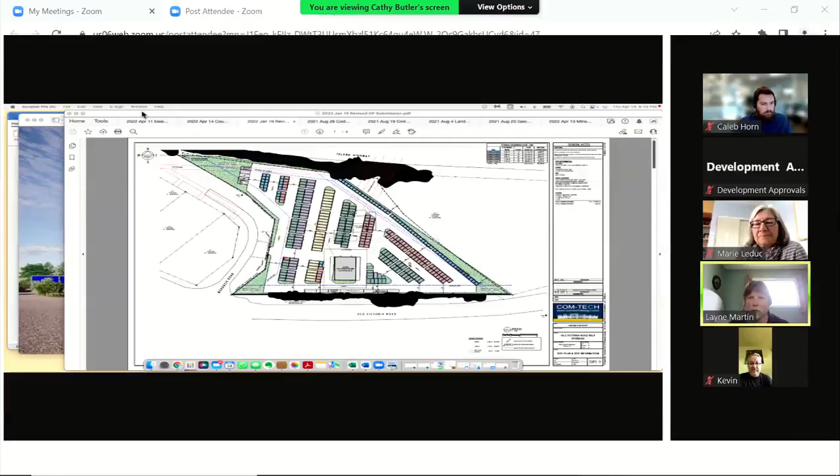We started out with the site, and instead of larger or low-slung pods, we designed smaller pods, as you can see - like that, that's a good one. We've spaced them out into a pod facility through the building code to maximize the site and allow for driving areas around it. In the northwest corner, we have a green space we're trying to keep so the whole site isn't totally filled with pods. That's one area where we're doing more landscaping and bringing up the greenery.

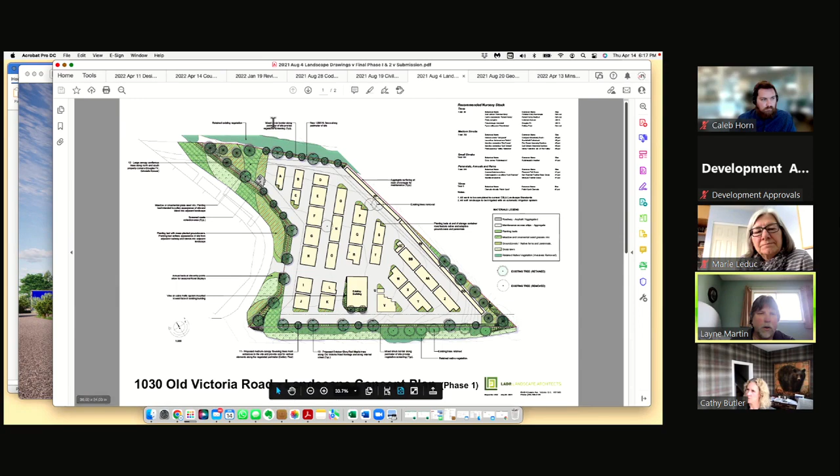Meanwhile, there's a whole area surrounding the site, especially on the island highway side, that we're trying to green up. If we go to the pictures from the highway side, driving down the highway - that's the type of view, and we're trying to hide it from the highway so it's not much of a distraction to drivers. So we're trying to hide the main single-story pods from the highway side, and any increase in landscaping is also trying to do that so drivers aren't distracted.

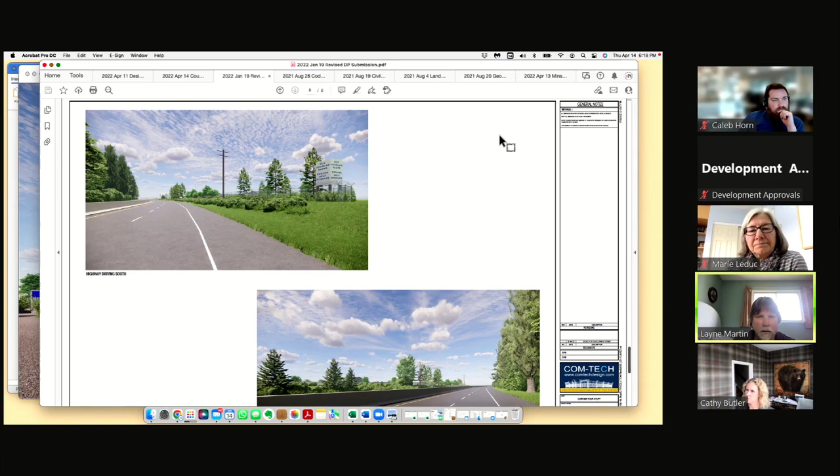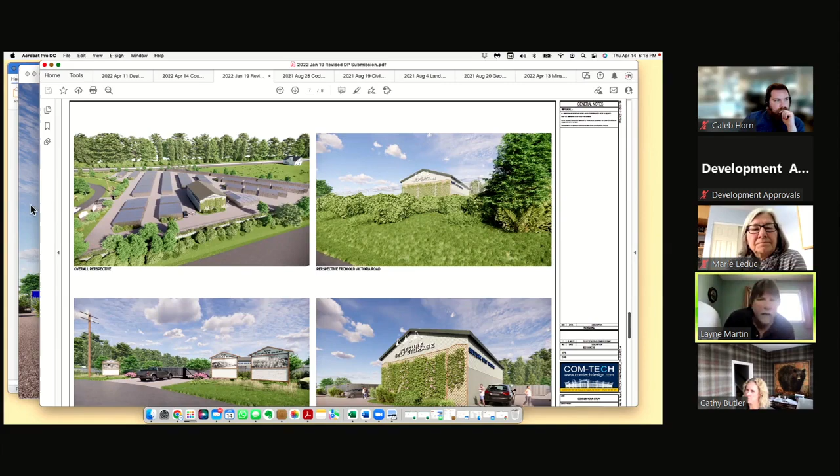Yeah, this is the latest drawings here. This one. This is the latest.

So this is the main building that exists and will follow and upgrade. It's an older building existing on the site that will have internal storage. We're trying to put some signage and upgrade the outside, adding a little bit of greenery and main lights on that building, the logo on the side, and lighting on the Old Douglas Mine Storage area that we'll try to call it and bring people's attention to it.

You can see in the background here also the pods. They all come in a silver color, essentially. The pods are actually...

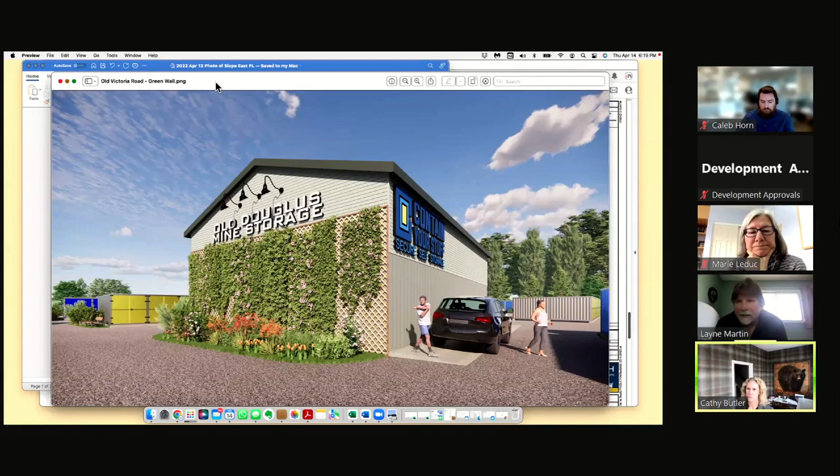not sea cans that are kind of old and rusted. We buy new sea cans, or new pods, that are built right on site and assembled from a manufacturer that we buy from. So it won't look like old sea cans stacked 20 meters high. It'll all be single story type storage area.

You can go on. Try and find this one.

Yeah, so the other item we're trying to do is the entrance point to the site will be gated. We're trying to have some decorative fencing, as was suggested by some of the commentary from the first view of the site.

So we have a planting bed that we're planning on the right-hand side. We're also trying to engage people right away so that they're not driving into a neighborhood or anything like that. We're trying to control the traffic that comes off Old Victoria into our site directly.

We have this large timber signage piece on the left-hand side, and we'd also like to put some historical pictures and historical items about mining operations, stuff that happened for the coal mining in the surrounding areas. So it's a little bit of a historical area to read about if they're driving around.

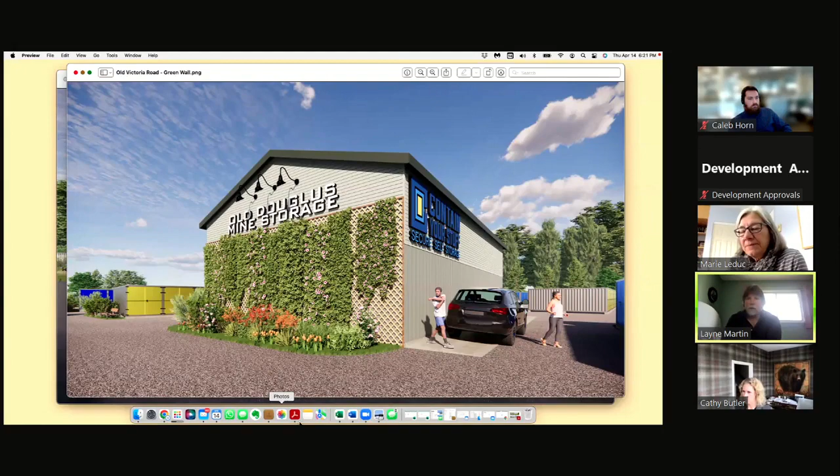Did you want to go over the landscape plan at all? I would let that go over with the landscape person. Maybe do that first, and then we'll have the panel give their comments and ask questions. Okay, yeah, absolutely, thank you.

So thank you everyone for having us. I'm Chris Windjack with LADR Landscape Architects. As you know, I've been here a few times and was introduced earlier. So the landscape design and general concept for the site was talked about a little bit by Layne earlier.

The intent is to screen as much of the actual storage facility as possible using greenscape and landscaping. To achieve that, we've attempted to utilize a combination of native screening plantings, retaining a significant portion of existing native plantings on the perimeter of the site, and introducing tree plantings along the perimeter to work together to create a sense of screening without planting trees so densely and closely that it just looks like a large hedge.

Trying to come up with a more naturalistic form for the site was the intent, so that it appears less like a manicured and intensely fabricated landscape and more like something that blends in a little bit better with the surroundings. So, native plant use, as well as an emphasis on limiting lawn as much as possible.

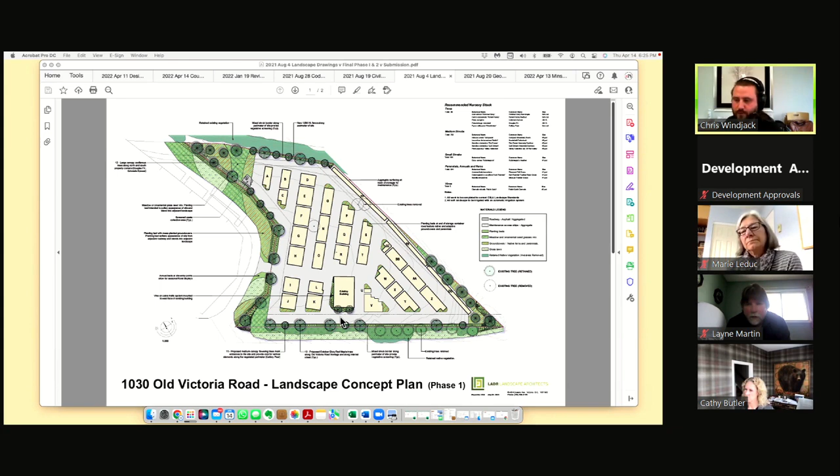Another feature of the landscape design is on the existing building, where we're looking at adding a cable trellis system and having vines growing up, that's visible from Old Victoria Road. So again, where you would see the building, you would get greenery on that side of the building, and we're trying to mitigate the impact of the views as much as possible.

That's it for the landscape design. I'm happy to answer any questions that you have, and thank you for your time.

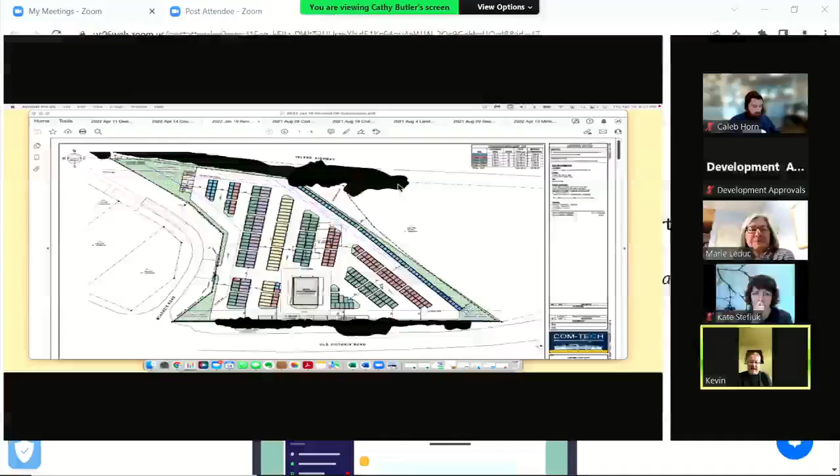I think this is Cathy Butler speaking. The first variance discussed is from the Island Highway, and that relates back to the Ministry of Transportation and the setback from the highway, and I can have Jen comment on that.

The setback bylaws, from what we understand, is if there's a secondary access, that there's a 3 meter setback from the highway, and so we'd be asking for a little bit less than what is suggested here. But these are storage containers, and so the highway's here, we're asking for a 3 meter setback. This at this point is not a setback from the property line, and what we're proposing is that we can remove a few of these and be in compliance with the setback.

Yeah, but what I don't understand is it says along the highway there's 4.5 meters, so that would be that north property line, I would assume, along from there all the way along there. And so it's just that little strip there that at some point goes down to 0 meters. That's what you're saying? Because that's how we understand it. That little block of those little blue blocks that come up to that.

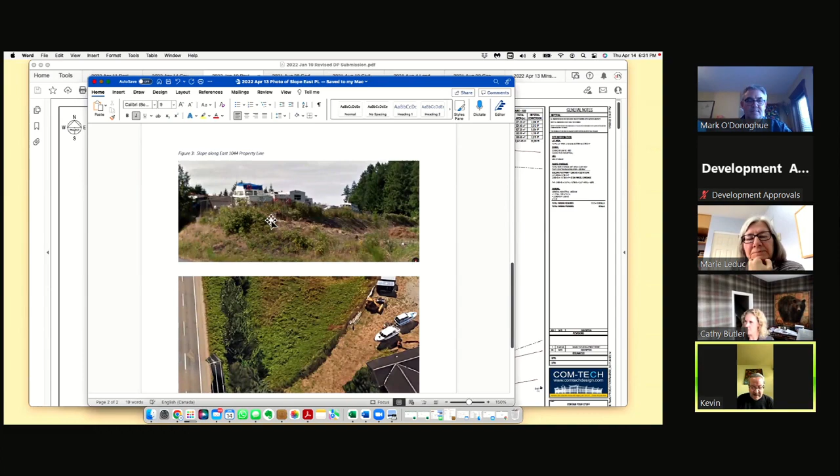Aside from that, I agree with staff comments that it would be very nice for you guys to individualize these units and use color instead of the standard metal cladding, and maybe even look at ways to individualize each aisle with different color. Probably what would be best would be something more earth tone in color, that might blend in naturally with surroundings instead of something more contrasting.

Aside from that, these are what they are, we need these. It's a very good location to put these units in.

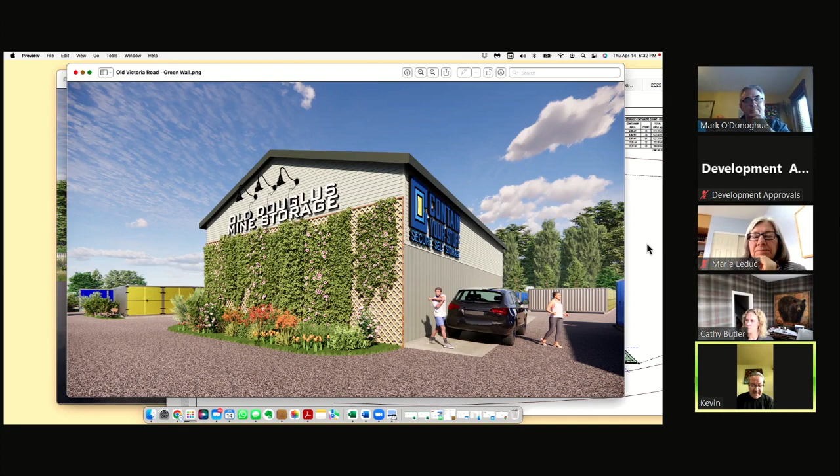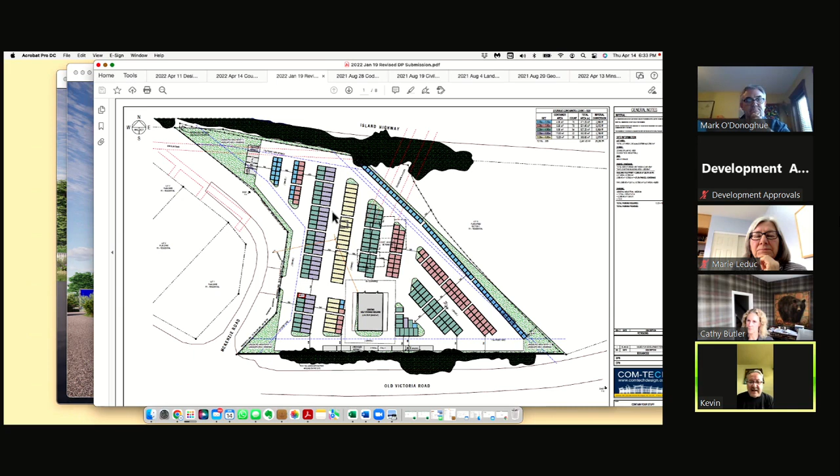Questions that I have are with these units, can they not be attached together more? Why have separation between some of them? There's really no need for pedestrian links between these. People come in, they drive their vehicle, they either load or unload, and I noticed the gaps between them, it's just better off to load them. There might be a rationale for it, but if you want to jump in, please.

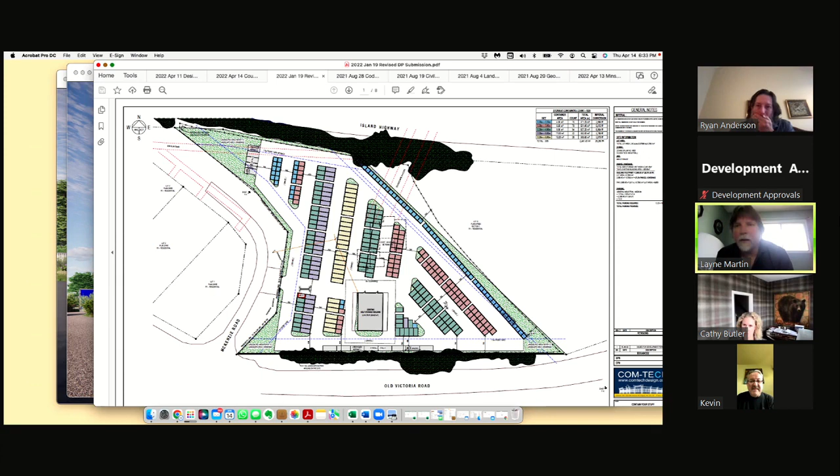Yeah, I can answer that. The pods are done in, I think it's 100 square meters. As soon as we make a pod and attach it more, it becomes a building that we have to sprinkler, so that's why the separation is a building code issue. Otherwise, all of a sudden we have these pods with all this external sprinkler system and piping all over. That's how come we made these pods the way they are and separated them, with the amount of separation and fire separation needed from heating one pod to another. So it's a building code item that's made it like this.

Yeah, okay, that answers my question. I don't think there's going to be really any safety issues there, because obviously it's a gated thing. So they become those little corridors that, what do you do, do you put wall packs on there to keep them lit up, they become a little bit of an issue. But I accept your explanation on that, so I won't dwell on that anymore.

So where's going to be your main office building? Is it the existing building?

So the site will be managed remotely, which is how we manage the site in Penticton that's been referred to. We'll have an automatic gate at the entranceway with codes for security for customers, and payment, e-sign leasing, all of that happens remotely. We have phone call and call service for off hours and emergencies, so there won't be an on-site office. We will have a mechanical room, and we do have a security property manager that would sweep the site daily for a few hours. That's how Penticton again is managed.

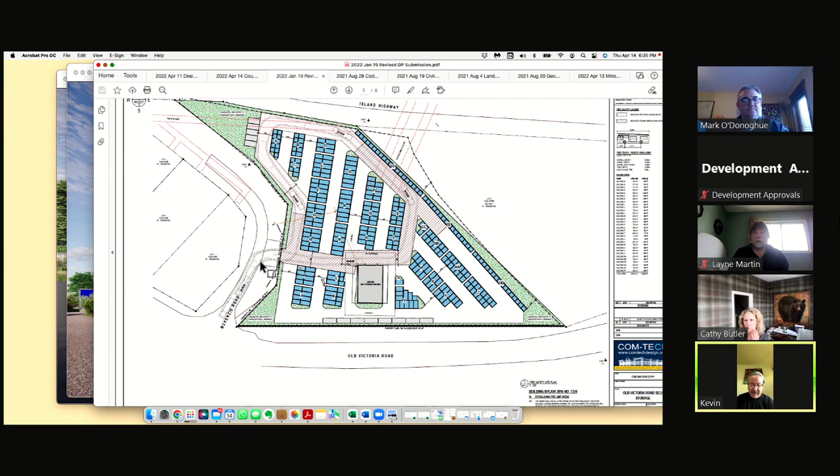Aside from that, I would hope you really think about this, going back to the finish color, the units and wayfinding methods to guide people through the site with their vehicles. Keep that in mind. I like how you're making use of what we can call public art with those signs out front, but I'd strongly recommend, if you go through with that, looking at ways to use materials that will last the test of time.

If you're going to put wood on them, they look pretty thin, so you might want to consider materials with more longevity. I really like your concept, and I hope you'd consider that, and possibly, since on one side it looks like you have two side by side, maybe there's a way you can join them together.

Aside from that, in the staff comments it mentions the use of bamboo in the planting concept, but I don't see it in your palette. Is that something, Chris, that you can comment on?

So we don't use bamboo like bambusa. We are using heavenly bamboo, which is Nandina. It's a shrub that has sort of a bamboo-like form to its stems, basically an upright kind of shrub. It's not invasive or spreading at all like regular bamboo.

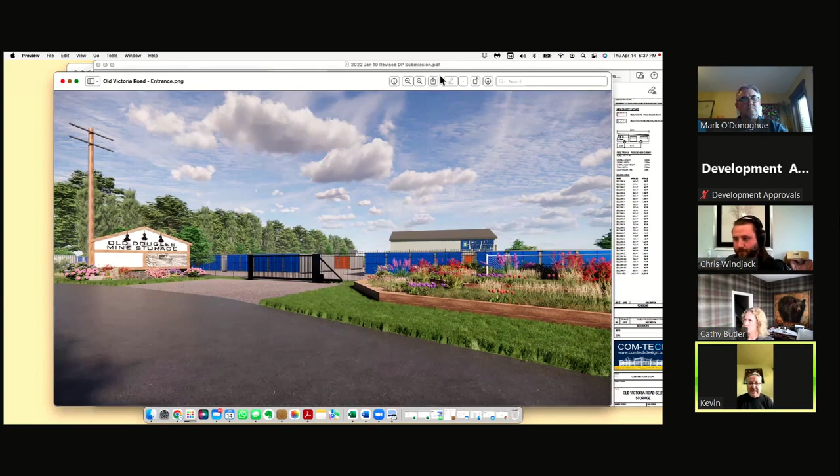Yeah, so we did consider it. Part of the issue with conifers is that they branch out lower, and along Old Victoria Road, where we have the shrubs, they overhang the gravel drive aisles somewhat. So it's certainly a possibility we could look into, but we'd need conifers that are narrower in canopy, since we were trying to maximize canopy size. Until a conifer is quite established and you can limb it up, it's not really going to provide much screening, but you could put Serbian spruce or other options in there.

So it'd just be nice to have some trees along there that, in the winter months, aren't going to be barren for the most part.

The only other thing I have to comment on is the buffer between the east property line and that residential area. I really hope you can do a bit more to provide more of a buffer there, because in some areas we really don't have much of anything. Along that little strip, if you can provide more buffer, and anywhere you can add more trees and shrubs—I'm sure Kate will probably say the same thing.

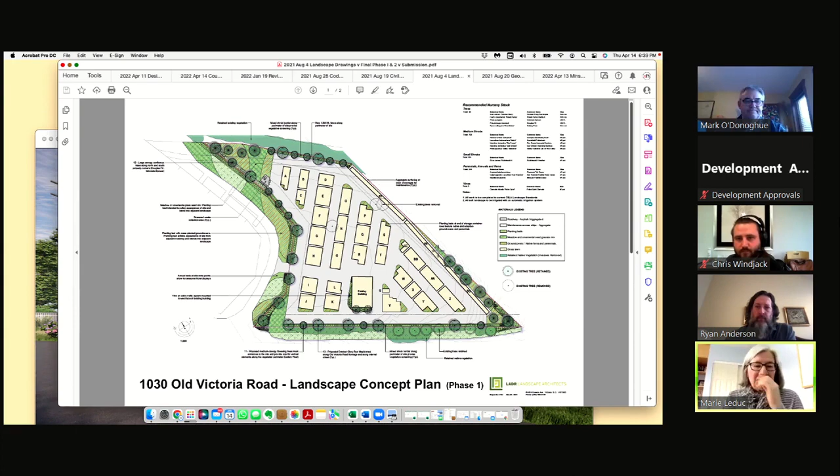Sure, thank you Madam Chair. Thank you for your presentation. Again, another challenging site—I can imagine the conversations you would have had to have with staff to be creative with these building types and siting them on these old potential mining shafts and challenging geotechnical issues. So kudos for working through all of that.

I'm just looking at some of the thoughts around ensuring integration with the neighborhood. It is quite a residential presence around there, so I do concur with staff's comments on providing as robust landscaping as possible in all the locations that make the most sense. I'm sure Kate will give some more detailed ideas on that.

I wasn't so keen on supporting a variance that brings it to zero for buildings along that eastern lot line. I understand there's a slope there, so that makes more sense since you're not impacting a building that might get built close by, but there's still a visual presence there, and it's taking away from some of the landscaping that could buffer the future use of the other lot. So I'm not 100% sold on supporting a variance on that side.

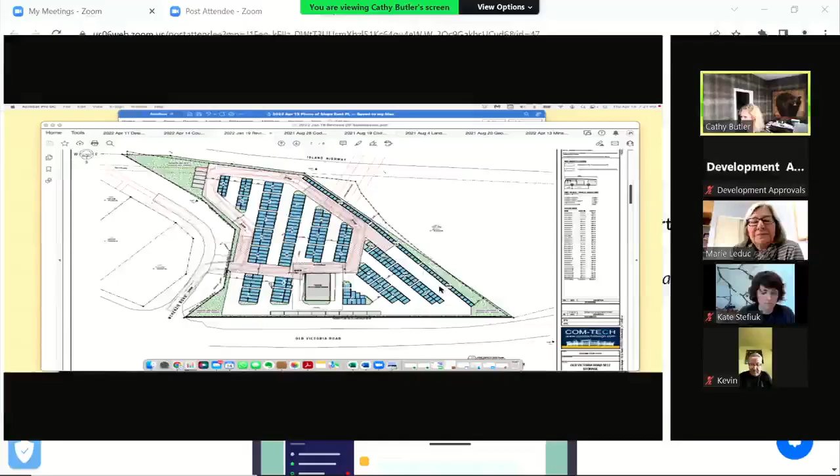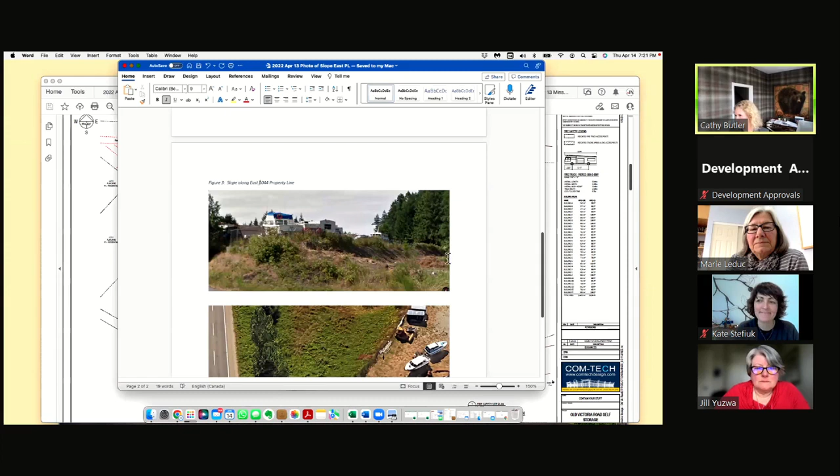What Chris was talking about is in and along here, to go back to an aggregate surfacing on the back, where he's saying we could have cedar hedge or hedging, which would be higher than the fairly low profile storage unit, and could be a buffer all along here.

To provide screening there. Again, the developer who owns this property, we hope we'd be able to work with him to have trees and whatever is reasonable there. He is trying to go industrial and is in fact talking about storage. So yeah, I think we can have a cedar hedge or something here that would serve the purpose of screening.

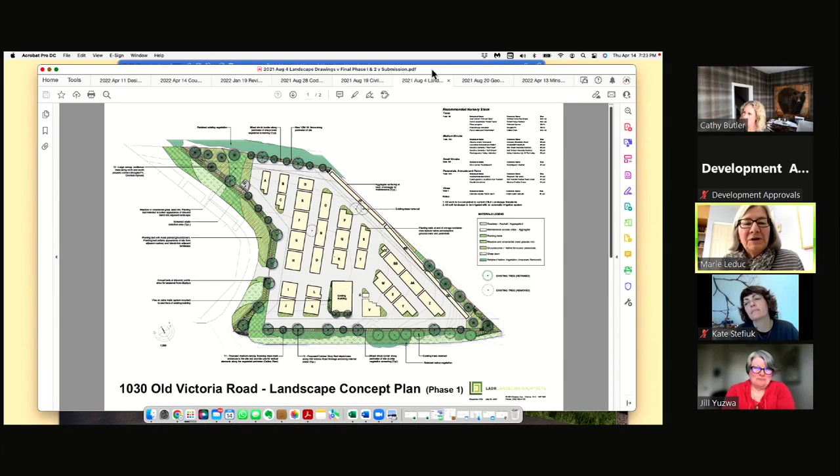This is quite a bit of landscaping right here, so hopefully a hedge would do what you're driving at. Okay, maybe you're going to stop sharing your screen then.

So maybe we could just recommend a landscape buffer along that east side of the property. Does that make sense to you guys? So consider a more solid landscape buffer along the eastern edge of the property.

And then, do we have an agreement on the variance with that recommendation? Okay, so what I'm seeing is we have 5 recommendations. Can somebody make a motion to accept with those 5 recommendations and support for the variance? Jill, are you? Okay, so Jill makes the motion. Do we have a seconder?

I'm not seeing- oh sorry, Jason, your face is covered on my screen. Thank you. All in favor? Okay, looks like it's unanimous. Great, okay, so that will go forward in our minutes.